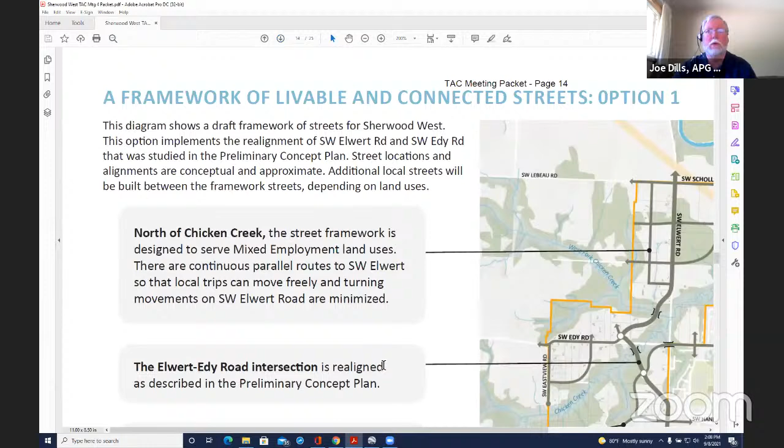Okay, so let's go on, and here's where I'm going to have to adjust maps a little bit.

I'm going to zoom out and then zoom back in. So the first of two options, what we've done is basically make a street plan for Sherwood West.

This is building off of the preliminary concept plan in many ways. The two options for the alignment of Elwert being kind of the most fundamental way.

But we've zoomed in and taken a closer look at topography, some of the roads that were placed in the preliminary concept plan, thinking about our updated land uses, that whole set of updated thinking that's been going on in this project.

And this is the working first draft of a street plan for the area. So let me go from north to south, and then we'll back up and see what questions and comments you might have.

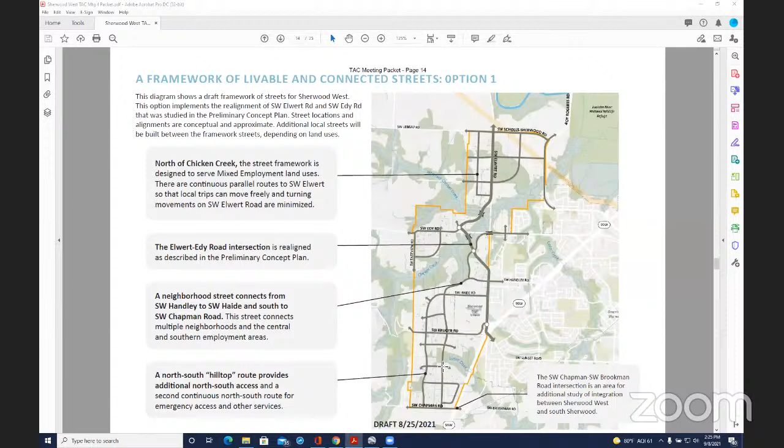Hey Joe, this is Glen from ODOT. I really appreciate your very intentional proposal here for having multiple routes and parallel routes. Partly, obviously, functioning of 99 being important, but also in our climate world with fires and disasters, I think it's very smart to apply that resiliency to have multiple ways in and out.

I have one very small request, and I'll understand if it's not feasible, but there's a project in the TSP known as D11, I think, which is a parallel route where I'm wondering, since you have arrows on other places where the roads would go, where traffic would go, if maybe at the Kruger-Elwert intersection you could have a little northeast gray arrow that just relays to folks that there is that future roadway there at some point in time.

And take me back to the geography of where you are referring. So it would basically connect from Handley, near where that creek is, down to the Elwert and Kruger intersection. So it's a parallel route to 99. There's several development sites in there, so ultimately it will be a private sector delivered transportation feature, is my assumption. On the east side or the west side of Elwert?

It is east of Elwert, heading northeast up to just before the creek on Handley, or just after the creek on Handley. It's part of the Cedar Brook Way extension, just a dashed line in the TSP - a couple arrows. It's described, and it's project D11. Yep, mhm, okay, thanks.

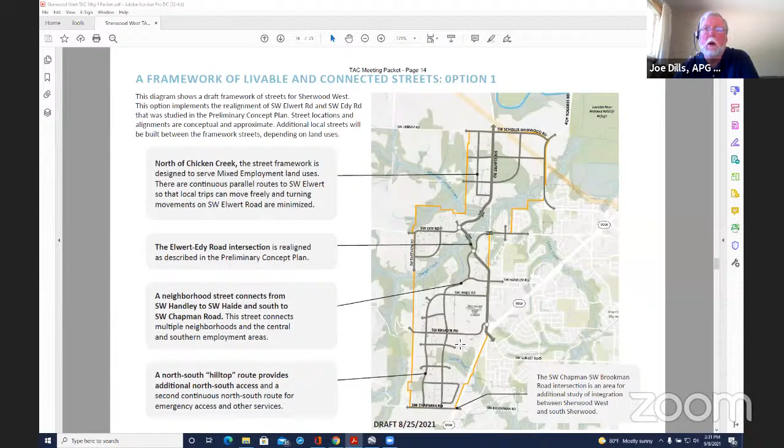Do the same thing on the bottom, on the very southern end, some kind of access off of Chapman right there. Right, some kind of connection—it's already kind of built on that piece there.

I'm sorry, Joe, those would be my thoughts. If the plan is to leave that Chicken Creek, that entire wetlands area, undeveloped, then that's actually going to help us, as long as we have some side access points. Otherwise we're going all the way back to that first intersection, making a left turn, making another left turn to come in the back door. From an emergency response and tactical perspective, we would much rather be able to surround a problem than be one-sided.

So those might be emergency access types, driveways for emergency responders, as opposed to full access streets, right, Chief? I suppose, but what ends up happening is they end up getting blocked off, and then we've got keys, gates, and moving bollards. So that's better than nothing, but just things to put in the notes and think about as we move forward.

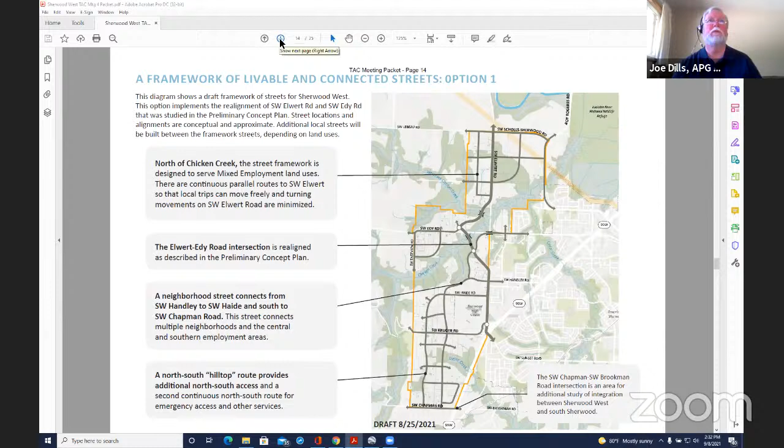Gotcha. Okay, let's move on to the next map, where really the only difference is the central area. Elwert is carried as its current alignment, same with Edy. Then the local road system is reorganized to respond to that, as opposed to the realignment. And I think Ryan had a question.

I see your hand is raised, go ahead Ryan. Oh yeah, thanks Joe, I was late to the game. So I know we've got those sections blocked out for employment areas, and I'm assuming those are kind of placeholders to get us to where we're at, right? We have to have some type of framework. Are those set in stone now, or did that come out of the CAC more, where those are definite employment areas since we're designing roads through them?

Not set in stone. The next phase of our work, roughly on the calendar for October, November, is where we'll start filling in land uses and look at alternatives. So if we were to make some adjustments in what is employment versus what I've described as employment transitioning to residential, we'd look at the road system update.

Thanks, Joe. I was going to wait till the walkable neighborhoods discussion to bring that point up, but since we started talking about running lines through there, it came up, so okay. Thank you, Erica, for helping me see who's trying to talk here—my screens are a little challenging in that respect. No problem.

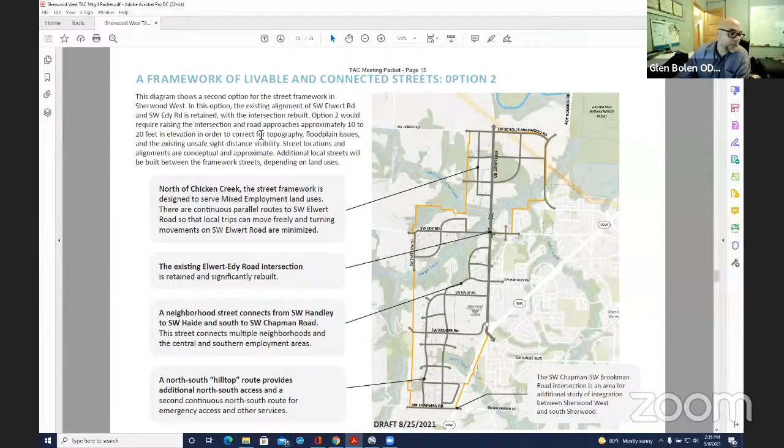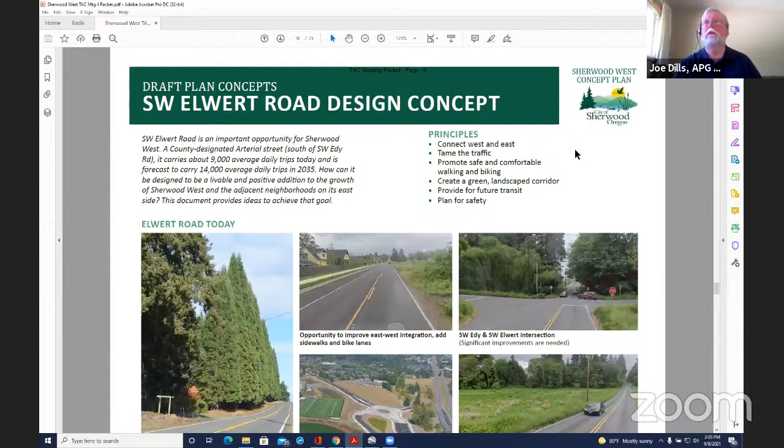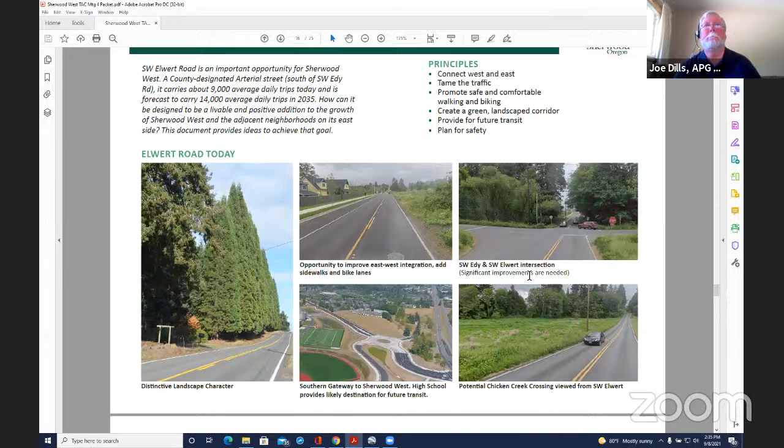All right, I'm going to move us ahead to Elwert. I think it's pretty obvious that it is an important street serving this project area. We started with studying some of the existing conditions compiled on this slide. It obviously has a lot of length to it, a lot of different existing settings.

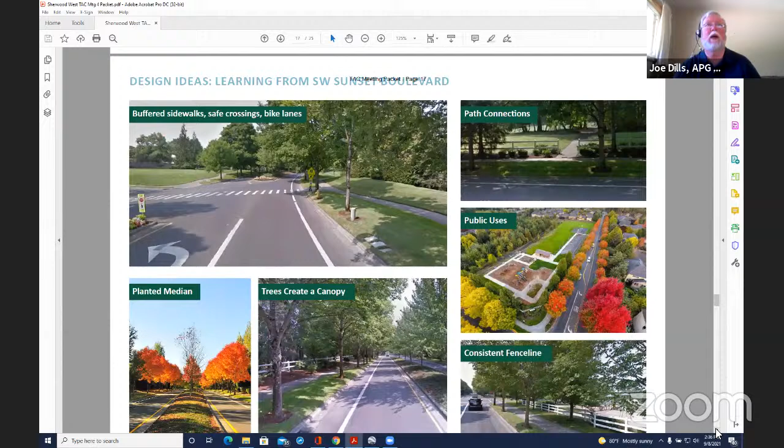Let's go to the next slide. Throughout the conversation so far, we've had multiple mentions of Sunset Boulevard in Sherwood as being a pretty successful street and something that we ought to take a look at, maybe not copy, but at least learn from it for Elwert. And here we are, I don't know how long it's been, 20-ish years since Woodhaven was designed and began construction.

Here's our catalog of what Sunset tells us today. It's got the generous buffering of the sidewalks, pretty safe crossings, these path connections where you don't have a street, they're very obvious and direct that come out of the neighborhoods. Planted median, canopy of the trees, a consistent fence line. Some of this is reflective of good public decision-making, and some of it is reflective of the master plan community kind of genesis of the area.

But we cataloged this before we made the next slide of what we might suggest for Elwert. Let me pause here and tap into your knowledge of Sunset, or even other precedent streets, that help us learn for Elwert. What would anybody add to this list?

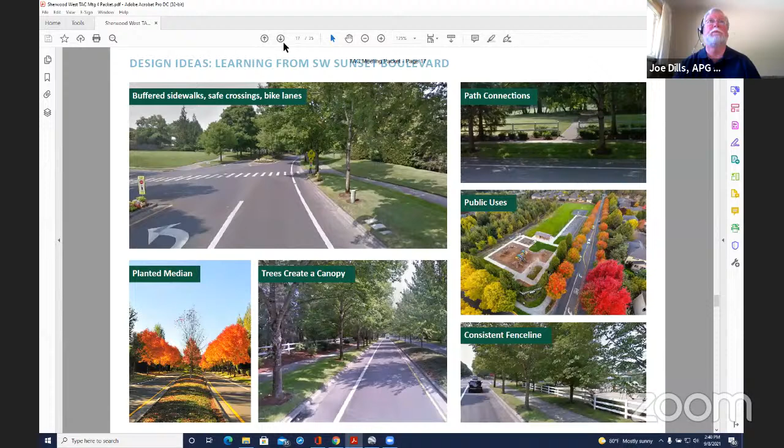Thank you. All right, so let's take a look at the concept map. I think I'll go from south to north. So the high school section is obviously newly built. I don't know, I can't recall to what extent they completed the east side of the street, but the cross section is basically kind of set. I'll be interested in any comments that folks have about that.

But then what we sort of hit on was that the character north of Haide, from Haide up to the Chicken Creek crossing area, is a pretty important area to try and get those qualities. They may not be exactly the same, but they'll get those qualities that Sunset has. So it's pedestrian oriented - there's a multi-use path that would go north from the high school. The fencing might be made consistent, similar to, and the idea being to try and think of the areas on the west and the east side of Elwert as being knit together by the street design.

A couple of differences I'll pick up on the comments you all just had is bike facilities need to be more obvious and modern. And one of the principles we hit on is that this area should be transit ready in the future. So that's the thinking behind the purple section.

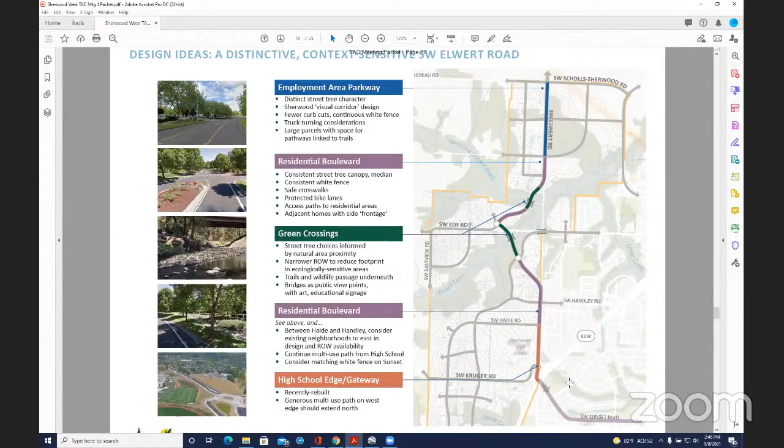This is Julia. I guess I have a comment / question on the high school edge gateway. Just a reminder that we have a plan to do the pedestrian overcrossing and whether or not we want to acknowledge that in this or not. Yep, good add. We definitely should.

I have a question too on where it says the multi-use path was recently built down by the high school should extend north. Would that extend along the whole length of Elwert? We think so. These concepts are that it would continue north all the way to Sherwood.

And we have a trails map that's sort of emerging out of the work that it would connect to for east-west trails.

Joe, kind of on that same thought with the multi-use path going all the way, and then I assume it jumps up onto the green crossings area and then off again. Is that the idea for pedestrian movement versus just going off to a trail? No, it would continue across these green segments.

Right, and it might be a combined multi-use path that's both ped and bike anyway. So I could foresee basically the multi-use path serving as one edge of the crossing.

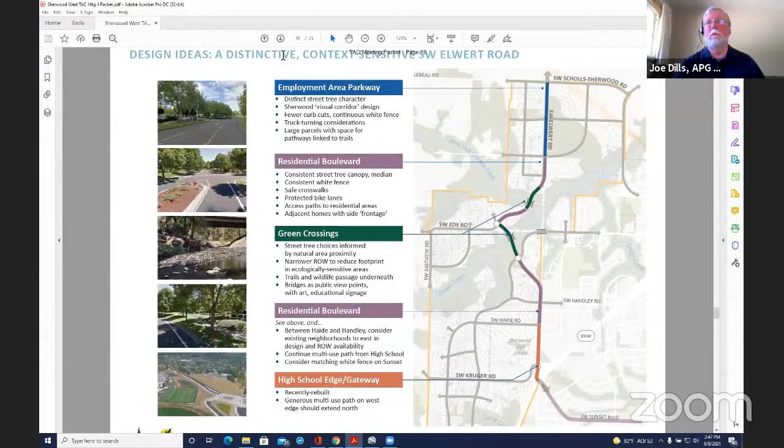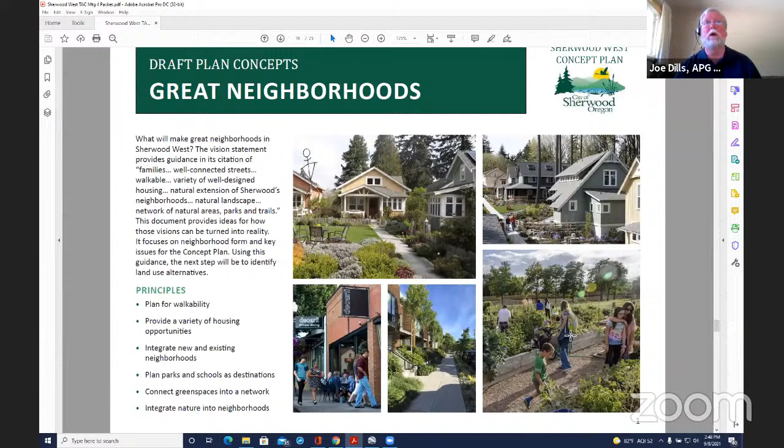The last concept is entitled Great Neighborhoods, and this is really the first step towards filling in land uses into the plan. The actual looking at densities and more specific land use mapping is for the work that I mentioned earlier, probably October-ish timeframe. But we wanted to introduce the idea of walkable neighborhoods as a fundamental design principle. So that's what all these pictures are about, and the narrative basically describes that.

And so we set about studying the walkability of the various portions of the plan. I'll also characterize this as kind of a second generation of the work that was done in the preliminary plan. So looking at topography, looking at natural edges, looking at existing development, it looked to us like the walkable areas kind of framed up something like this map, and I'll take you through the logic.

Again, if we consider this area, that will end up being all mixed employment. The edge of it might change a little bit, but for our purposes, there's a residual area defined as walkable, north of Chicken Creek. Of course, if the crossings are done well and you live right here, getting over to your neighbor over here is going to be pretty easy as well.

But that gets me to the second area of kind of cohesive land. It's a bubble of land to the west of Chicken Creek. It's got some topography to it, but there was not really a logical break in our study of breaking this into more than one walkable area. And there's really no particular science to this.

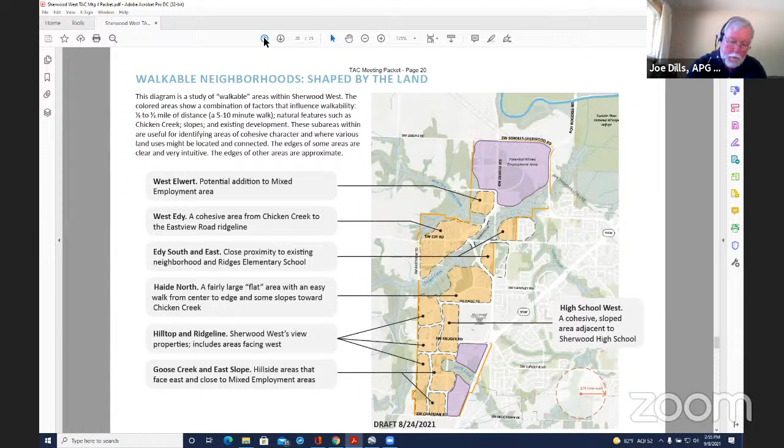As with the pedestrian corridor alignment, stuff like that, the ped bridge over the highway at Kruger Elwert and Highway 99 intersection - that would be good to show on this one too. Good.

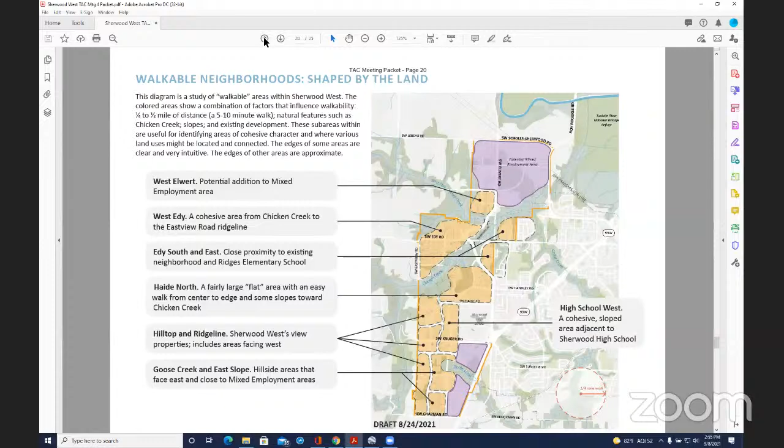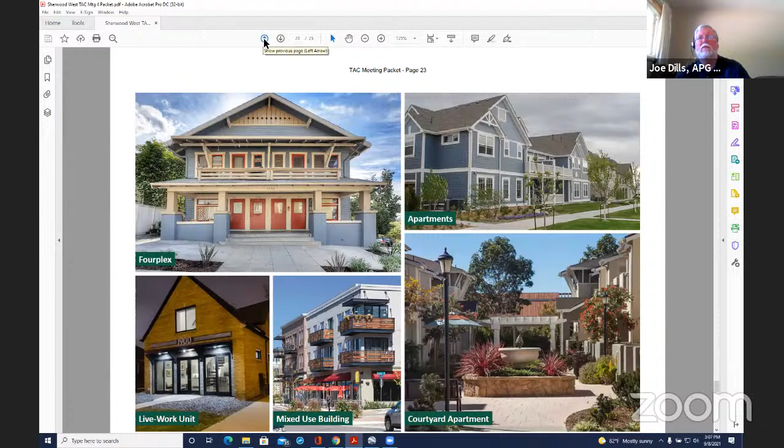The last piece of this was informational—I should mention this as well. So we're moving to the land use work here after we touch base with the community in early October. We're anticipating the range of housing types, including middle housing, that the city has been discussing in its middle housing project. There will be allowances for pretty much everything you see on the screen. Maybe the most urban choices will be subject to some discussion, but a range pretty close to what we put into this packet. We wanted to communicate that and have it part of the discussion process. We are in conversation with the state to understand how the middle housing statute applies in expansion areas. We learned some things in discussion with them last week, and that'll continue to evolve. So that's what this set of images is about, and why we put it in the packet.

Any comments, opinions, or advice on housing types as we move towards that work? Backing up - just now you're talking about land use. I see the larger scale employment, I see the housing. Are you looking at any local services tied to that? Like Hillsboro, for example, you get a certain number of square feet of industrial in, and then you can get the coffee shop, the restaurant, things to serve those folks, so they can eat on site or nearby, and maybe walk and get a beer after work.

Yeah, that's sort of been assumed, that small scale commercial would be part of the northern area. The central area down on Kruger may actually have a little bit more of a neighborhood commercial component to it. It's to be determined what this area looks like, so short answer is yes, Glen.

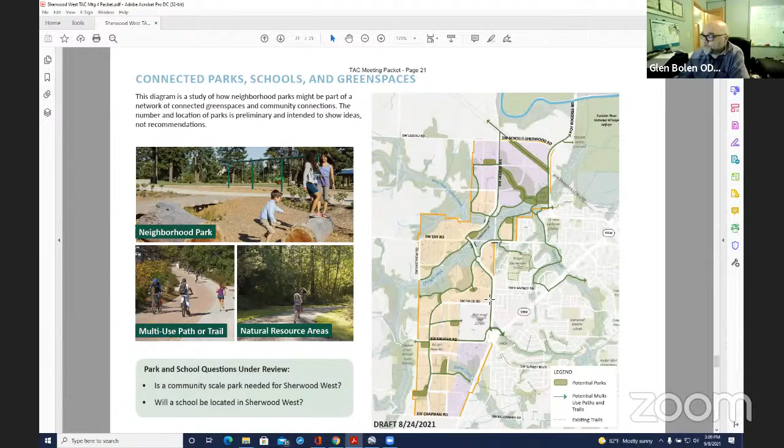Okay, open for any last comments, questions, or directions on this work.

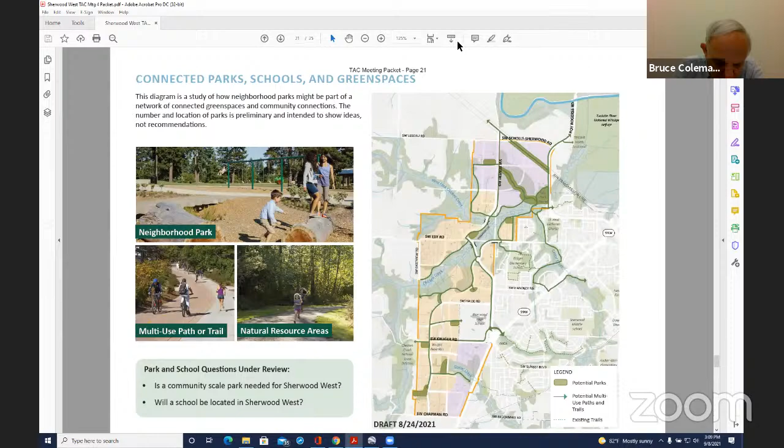Go ahead and unshare here. There you all are.

Ryan, did you have another comment, or is your hand up from a previous thing? Oops, that was number 4, my bad, let me take that down. Okay, no worries.